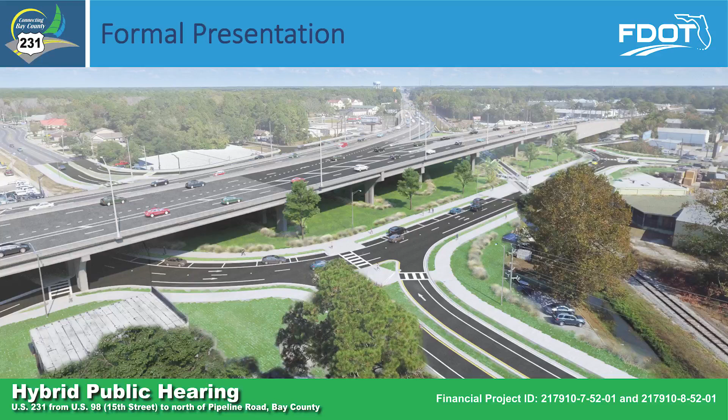All virtual attendees will be placed in listen-only mode throughout the public hearing. At a later date, we will provide responses to written comments that were submitted during online registration and those submitted at the in-person venue. The comment period begins as soon as the presentation has ended. Verbal comments from the in-person hearing will be addressed first. Verbal comments from the virtual online attendees will be addressed second.

Providing verbal comments using GoToWebinar is simple. First, you must request to speak by clicking on the Raise Hand icon. During the comment period, the organizer will call your name that you provided during registration and will unmute you. If the microphone icon is green, you are ready to make your comment. If the microphone icon is orange, you will need to click on the microphone icon once, and it will notify you that you are unmuted, and then you can provide your comment. Again, you will not be on camera at any time if you join online.

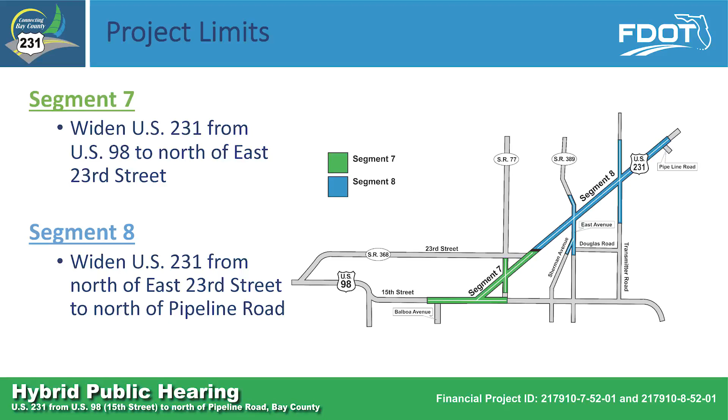The proposed design includes reconstruction of US 231 to increase road capacity from 4 lanes to 6 lanes. This project also includes widening of additional roadways within the US 231 corridor, along with significant improvements at several intersections. Widening and reconstruction will occur on the following roadways: US 98, State Road 77, State Road 389 East Avenue, and Transmitter Road. The proposed improvements are discussed in more detail on the following slides.

Right-of-way acquisition is required throughout the project limits to provide for the roadway improvements and stormwater ponds.

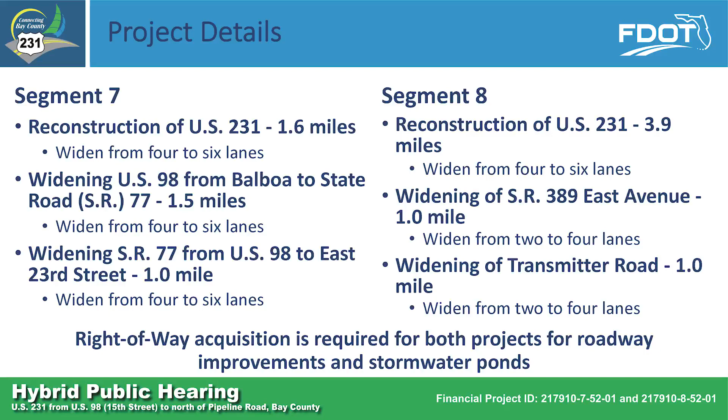Proposed improvements on US 231 north of Mill Bayou include widening from 4 lanes to 6 lanes, with 12-foot travel lanes, 7-foot paved shoulders, and sidewalk on the west side of the road.

Proposed improvements on State Road 389 East Avenue are from south of Sherman Avenue to north of East Baldwin Road. These improvements include widening from 2 lanes to 4 lanes, with 11-foot travel lanes, a grass median, 7-foot bike lanes, sidewalks on both sides of the road, and turn lanes at the US 231 intersection.

Proposed improvements on Transmitter Road include widening from 2 lanes to 4 lanes, with 11-foot travel lanes, 7-foot bike lanes, and additional turn lanes at the US 231 intersection.

Beginning in the fall of 2021, the US 231 and Transmitter Road intersection will be widened to include additional turn lanes for safety and traffic flow improvements. Additional right-of-way will be required on both sides of US 231, State Road 389 East Avenue, and Transmitter Road.

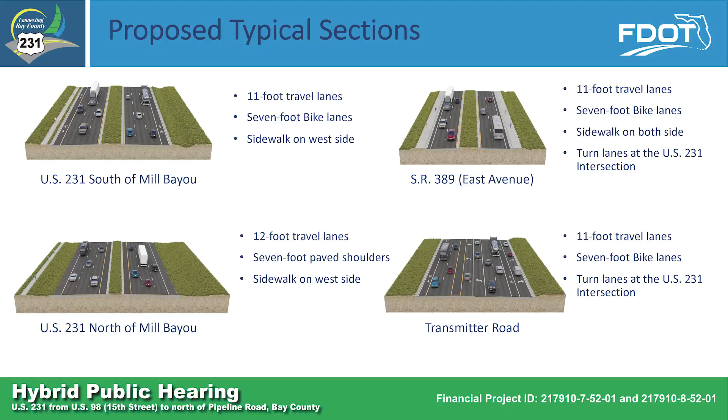The US 231 and US 98 intersection will have new flyovers that will cross over multiple intersections and the Bay Line Railroad. These flyovers will allow traffic from southbound US 231 to westbound US 98, and US 98 eastbound traffic to cross over multiple intersections and the Bay Line Railroad without stopping for traffic signals or trains.

A traffic signal will be provided on the flyover at the intersection between westbound US 98 and the left turn from eastbound US 98 to northbound US 231.

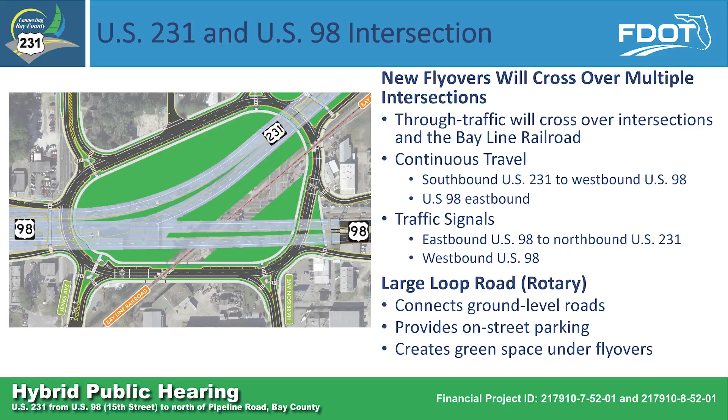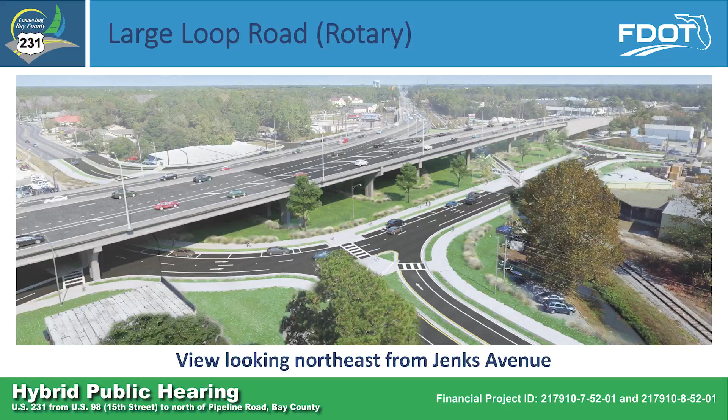Looking from Jenks Avenue, here is what the rotary will look like. Through traffic will use the flyovers, while local traffic uses the rotary.

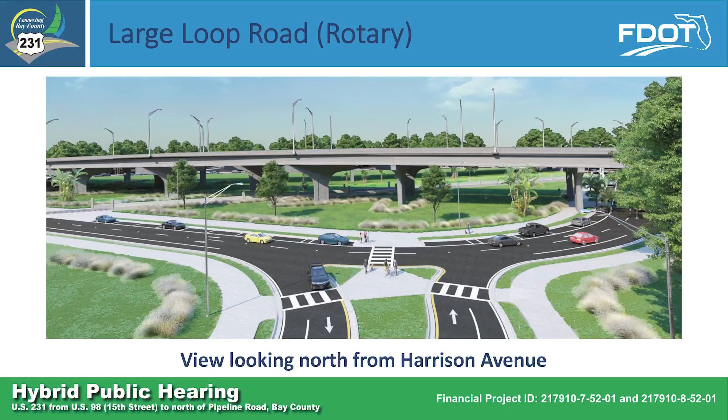Looking from Harrison Avenue, here is what the rotary will look like. Proposed features include access roads to Jenks, Harrison, and Grace Avenues, sidewalk, and green space underneath the flyovers.

US 231 ground-level motorists will be able to use traffic signals to access north and southbound State Road 77 and local businesses.

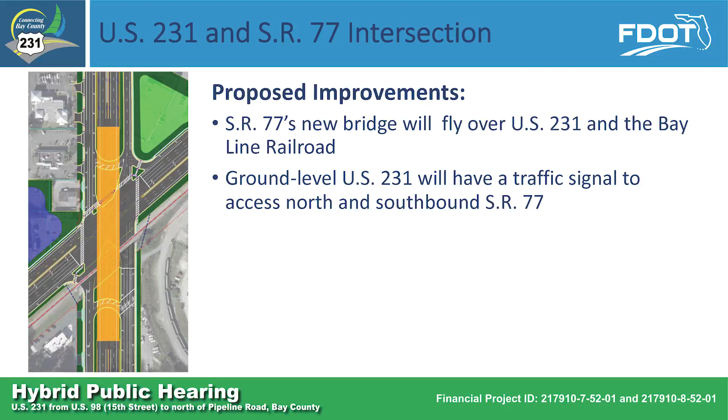This slide shows a closer view of the improvements at the US 231 and Transmitter Road intersection. The proposed improvements include adding turn lanes in all directions at the intersection. An additional left turn lane will be added in both the northbound and southbound directions on US 231 and northbound Transmitter Road. A dedicated left turn lane will also be added to southbound Transmitter Road. A single right turn lane will be maintained in all directions.

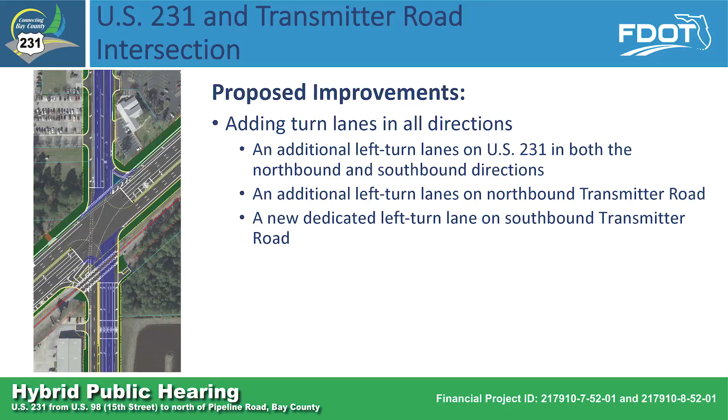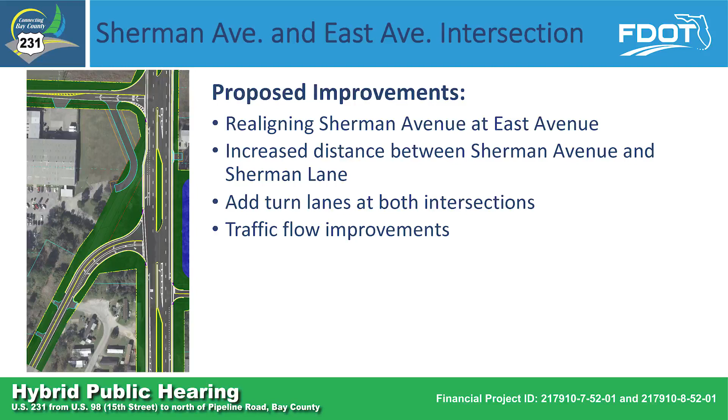This slide shows a closer view of the improvements at the Sherman Avenue and East Avenue intersection. Proposed improvements include realigning Sherman Avenue at East Avenue. This will increase the distance between Sherman Avenue and Sherman Lane, allowing the addition of turn lanes at both intersections and improving traffic flow. The proposed improvements include 19 new stormwater ponds and modifications to one existing stormwater pond.

The ponds will capture and contain excess runoff from the roadway system. Permitting will be performed on the project.

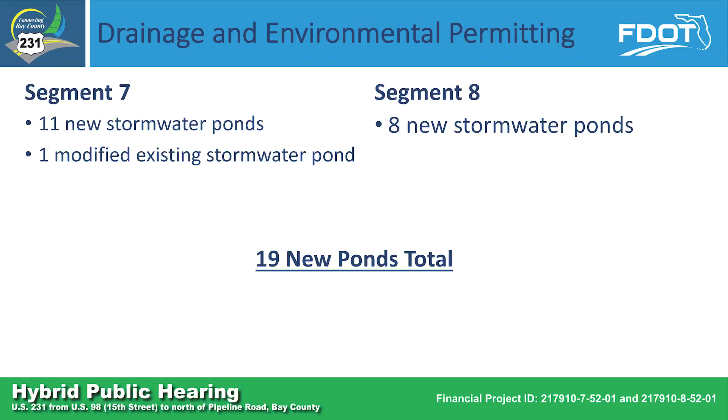The second segment, known as Segment 8, is from north of East 23rd Street to north of Pipeline Road. The design is currently on hold, pending additional funding. Design completion is scheduled for the summer of 2030. Right-of-way acquisition began in the fall of 2019, and construction is not yet funded.